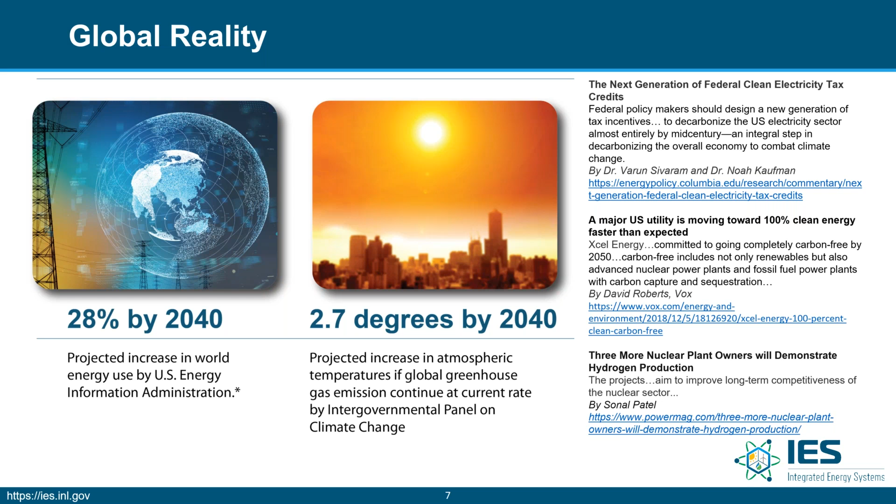If we look around the web at many different articles and announcements, we can find numerous examples of attempts to address these challenges. I've included a few here related to the introduction of federal clean energy or clean electricity tax credits, and utilities moving toward 100% clean electricity or clean energy across different use sectors. We're even beginning to see nuclear plant owners and operators look beyond the electric sector to address what else their energy can be used for.

I'd like to draw your attention to an article put out last December by the non-government organization Third Way. This article, and several of my slides, will focus on U.S. energy markets and sectors. Many of these trends, I believe, will translate to your countries as well, so please take these as examples, and I encourage you to look at what's happening in your own countries and regions. This Third Way article looked at clean energy commitments around the country to assess how we are going to achieve the incredible challenges associated with emissions and environmental impact.

Prior to 2016, 90% of the commitments out there were exclusive to renewable energy. We saw renewable portfolio standards, goals for 50% or even 80 or 100% renewable generation. However, since 2016, we've seen a reversal, with 65% of the states, utilities, and major cities that have these types of goals and standards now embracing commitments that are technology inclusive. These clean energy standards now allow us to take advantage of all clean energy generators, including nuclear energy, carbon capture and sequestration, as well as other carbon-free options.

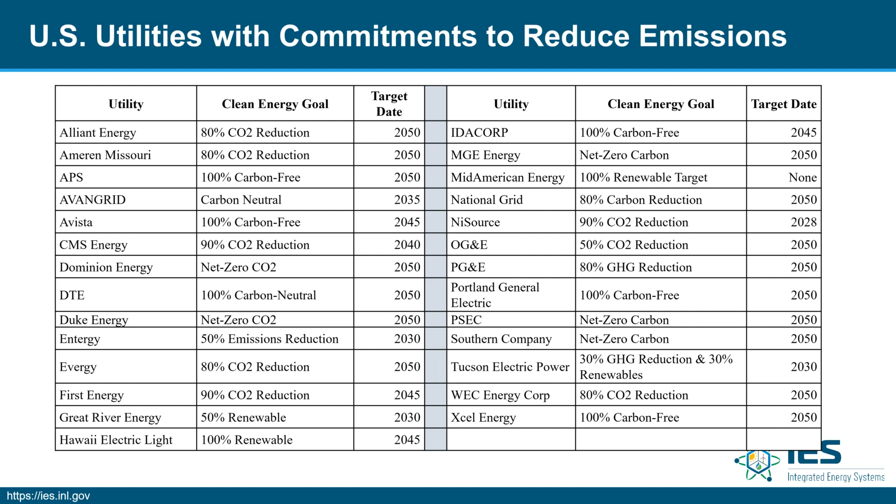Another way to do this, of course, is by increasing renewable generation, and introduction of wind and solar and hydro where it is available is a great idea. We really have to look at all the technologies available to us in a particular region to meet these aggressive goals. But let's pause for a moment and understand what that means.

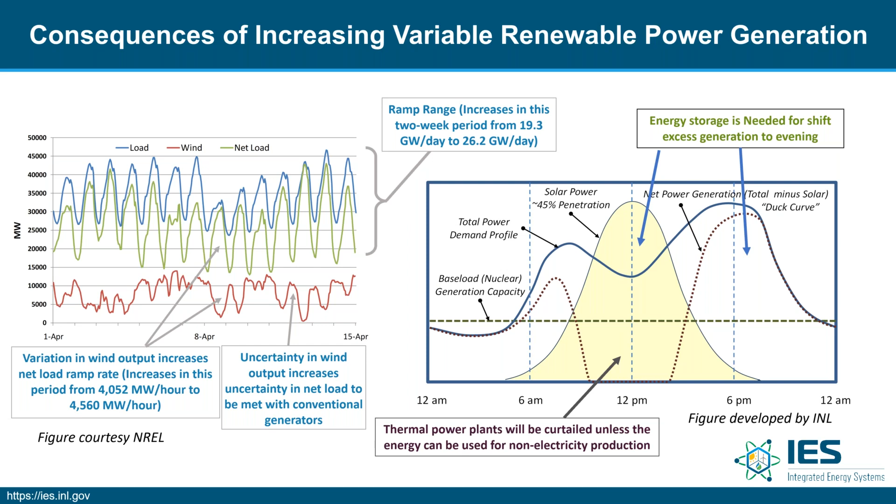So we did some analyses at INL, at Idaho National Lab, which is the nation's nuclear laboratory in the US. We did some analysis to better understand the volatility within the net demand and how that changes as we increase the penetration or the production from variable generation in a particular region.

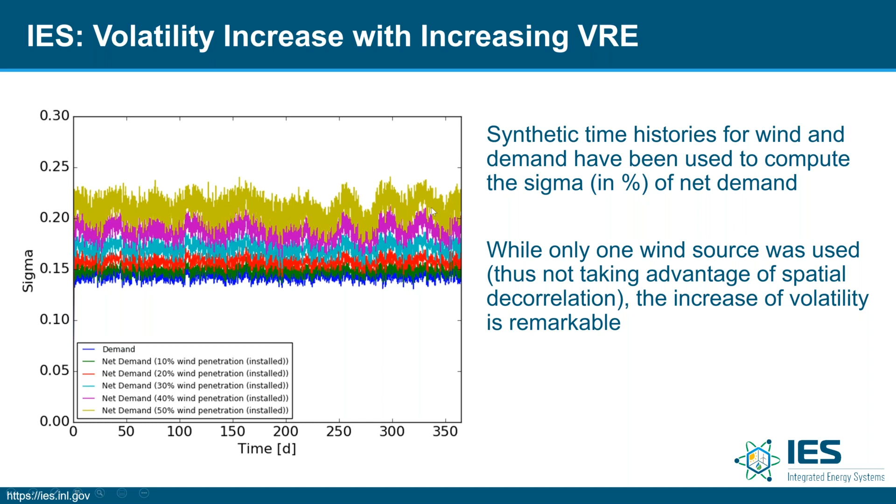A little bit of wind doesn't make a huge difference. A lot of wind does, and so we have to think about this differently.

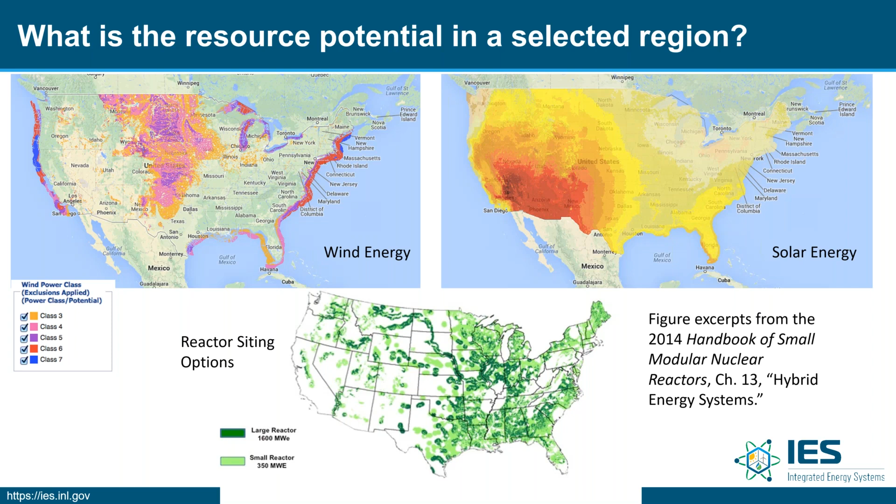Using this as an example, we can begin to understand that we will have different energy mixes and different opportunities in each region. So each of these analyses and considerations that we walk through in considering different types of energy systems need to take this into account for particular regional locations.

So what is the future of nuclear energy? Where are we going, and how will it play a role in these future energy mixes? I'd like to draw your attention to the Future of Nuclear Energy study completed in 2018 by the Massachusetts Institute of Technology and the many experts they brought in to work with them. I've summarized a couple of the key findings from this report.

Bottom line, the world faces new challenges of drastically reducing the emissions of greenhouse gases while simultaneously expanding energy access and economic opportunities to billions of people, those regions that don't have access to energy right now, and certainly don't have access to clean energy.

Second, there are a variety of low or zero carbon technologies that can be used in a variety of combinations in order to meet this growing demand. Absolutely, there are a number of solutions we can look at. But their studies showed that without contributions from nuclear energy, the cost associated with achieving deep decarbonization targets, dramatic reduction in CO2 emissions, increases significantly.

And overall, the least cost portfolios always include an important share for nuclear energy, and the magnitude of that share grows significantly as we bring the cost of nuclear down. So we need to reduce the cost of nuclear to ensure it continues to play a very important role in these future energy systems.

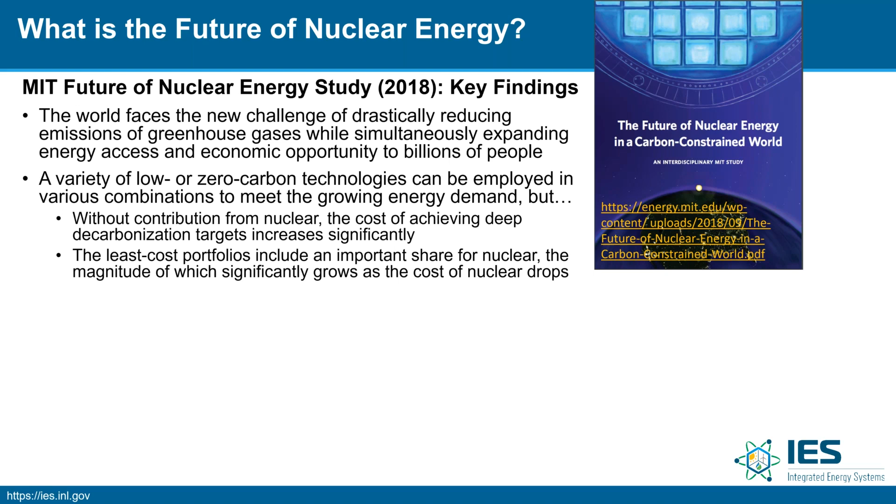Similarly, the International Energy Agency developed a Nuclear Power in a Clean Energy System report last May, in May of 2019. What they found, and one of the key points I like to pull out, is that despite significant renewable energy growth globally over the last 20 years, the overall contribution of clean energy supply to electric generation really didn't change.

Why is that? Well, in the US and in many other parts of the world, we have extremely low-cost, historically low-cost natural gas. As that comes in, it is displacing nuclear generation. So we have more renewable generators coming on, low-cost natural gas coming in, and pushing nuclear energy out of that marketplace. Natural gas turbines are scalable, allow for rapid ramping, and therefore are great complements to wind and solar generation, but they have associated CO2 emissions unless carbon capture is also implemented.

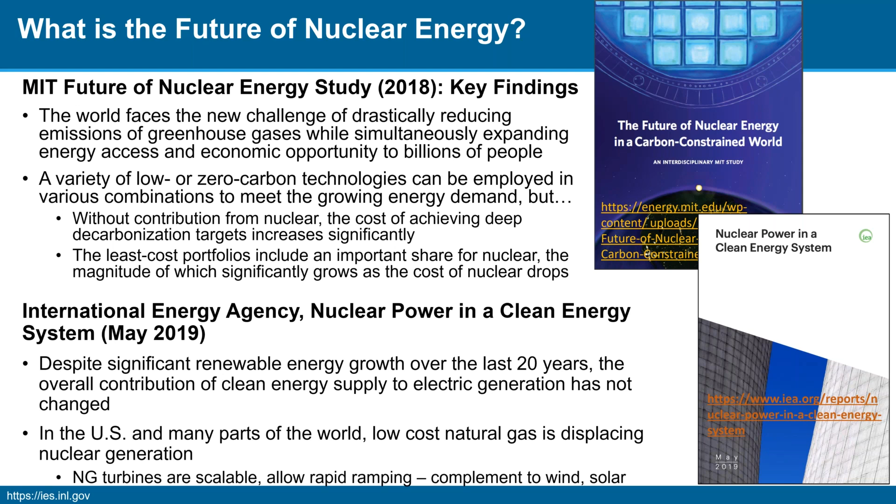So we need to think about how we do this. We need to be cost competitive with these other resources to ensure nuclear generation is not pushed out of the market and that it continues to provide such important shares of clean energy generation. Globally, nuclear provides one-third of the clean electricity generation around the world. In the US, it's more than half of our non-emitting electricity. So it's important that we don't push this out of the market inadvertently.

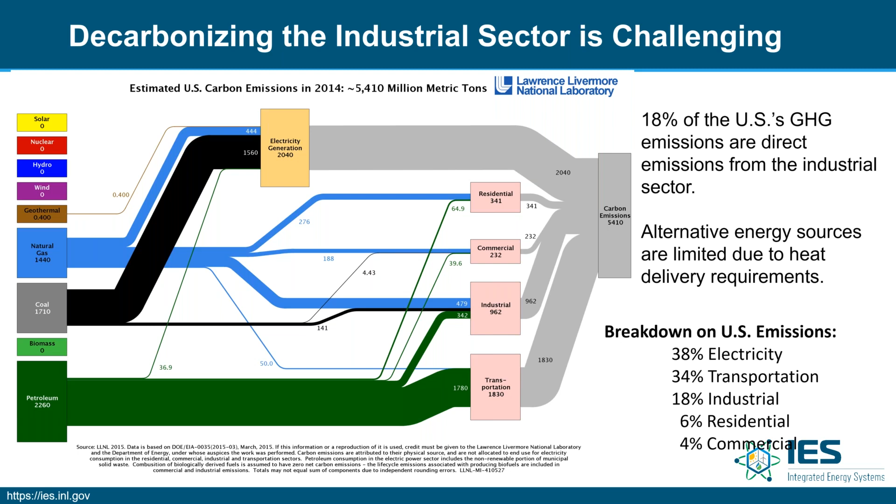Often when we think about achieving emissions reductions, we traditionally think about the electric sector. In the US, the electric sector contributes 38% of our emissions. But that's not all we need to be concerned about, especially with aggressive reduction goals. We also need to look at the 34% from transportation, and 18% from industrial processes, which are often very difficult to electrify and hard to support with anything other than a carbon-based resource that provides high quality heat. So we need to address these top three emitters—electricity, transportation, and industry—as we look to alternative energy resources and configurations in the future.

At this point, I'd like to take a diversion to talk about planning tools used for future energy resources, and energy market modeling. I'm no expert in this area and would defer detailed questions to colleagues who work with these tools regularly, but I've been learning a lot about how these tools model our markets and different technologies. This is extremely important for understanding how we plan our long-term energy mix and how we utilize these systems day-to-day and week-to-week.

First, capacity expansion models. These model the evolution of systems of electricity generation assets over long-range time periods. They consider changes in demand for energy, retirements of different units, and completion of construction projects for new generation capacity, in order to determine if additional capacity will be needed to meet future demand. If new capacity is needed, these tools determine the lowest cost capacity additions necessary to meet projected demand, including a factor for reserve energy, and they also account for how long it takes to build these new technologies. Some models include other parts of the economy to determine demand, but in general these focus on the electricity sector.

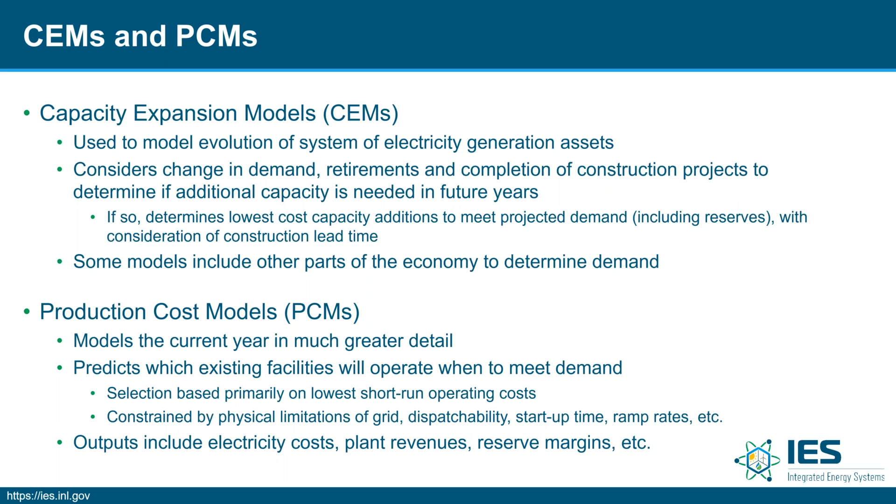Let's talk about the timescales these models operate over. When planning for our energy systems, we need to understand a wide range of timescales. On the left, we're working down to the 10 to the minus 3, or millisecond, timescale. All the way on the right, we're at the 10 to the 9 second timescale, or 30 years. We need to understand how different assets will be utilized across all these timescales. On the right are capacity expansion models—that long range planning, informed by a number of approximations. In the middle are production cost models, looking at near-term markets such as hour-ahead dispatching and day-ahead scheduling of resources, also informed by approximations. At the lower end of the timescale, we have assets providing frequency regulation and inertial response to ensure a reliable and resilient grid.

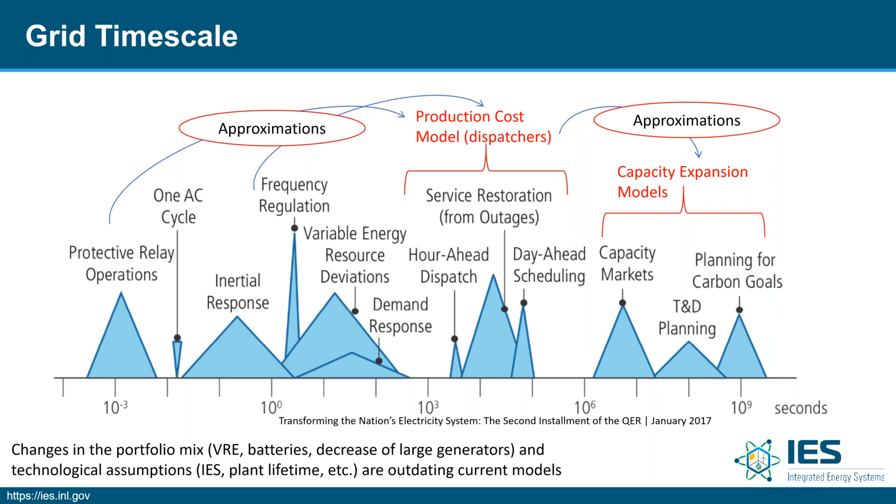Changes in our portfolio mix as we add variable renewables or batteries, or remove some of our large scale thermal generators, and various technology assumptions associated with modification of those systems, such as the introduction of integrated systems or extension of plant lifetimes. These changes are outdating the current models we utilize for PCMs and CEMs, so we need to understand what that's doing to our predictions.

A little bit further on capacity expansion models: as I said, these cover large regions. For the US, that means they cover the whole US, or large US regions. They take into account a number of different initial conditions, what the current portfolio is, the cost projections associated with many different technologies, and the cost projections for feedstock, the raw materials that need to go into a certain process, such as natural gas, coal, or uranium.

The predicted portfolio mix over the long term is highly sensitive to how we set those initial conditions. This sensitivity creates a nonlinear feedback associated with all these externalities that we just don't model. As we said, the time horizon associated with these is 30 years or more, so these are designed for a long-term economic equilibrium.

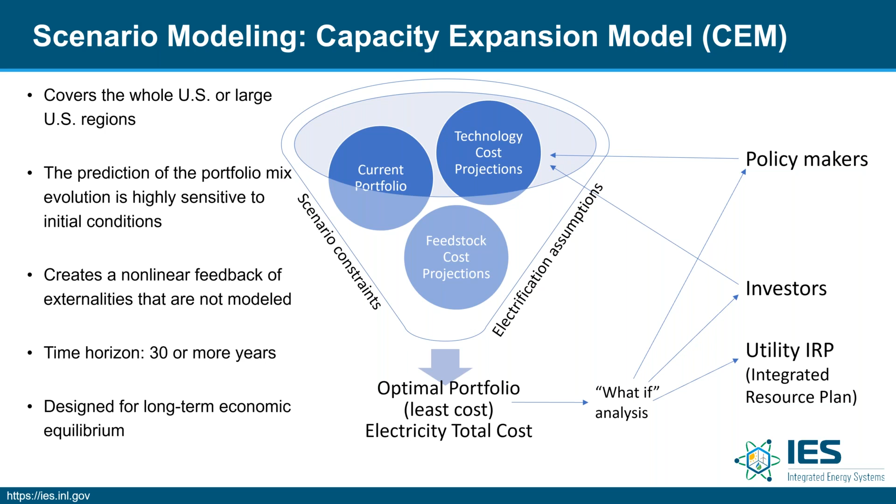These CEMs can take into consideration different policies. How will those different policies modify cost projections such that it will modify the end portfolio that is predicted? We have investors feeding some of that as well. Utilities use these tools to develop an integrated resource plan, so we need to understand all the different variables going into the system to understand their output.

So their outputs overall look at projected portfolio compositions. They look at increases or predicted increases and decreases in the cost of electricity. They can predict CO2 emissions at a given time in the future. And as we were referring to, they look at what-if scenarios with respect to new energy policies.

If there's a consideration to introduce a new energy policy, we can put that into these CEMs as an externality to understand the potential impact of both current laws and potential new policies that constrain the portfolio composition. We can also consider the impact of technology maturation.

What happens if technology costs drop dramatically? What happens if the capabilities of those technologies increase dramatically? We can also look at the impact on resources, changes in feedstock.

For example, no one predicted the historic low costs of natural gas that we have today, introduced by fracking. We can look at what-if scenarios that consider: what if natural gas were half the cost it is today? How would that change how we build out our systems? Or what if new reactors cost half of what we expect them to cost? How will that impact our overall mix?

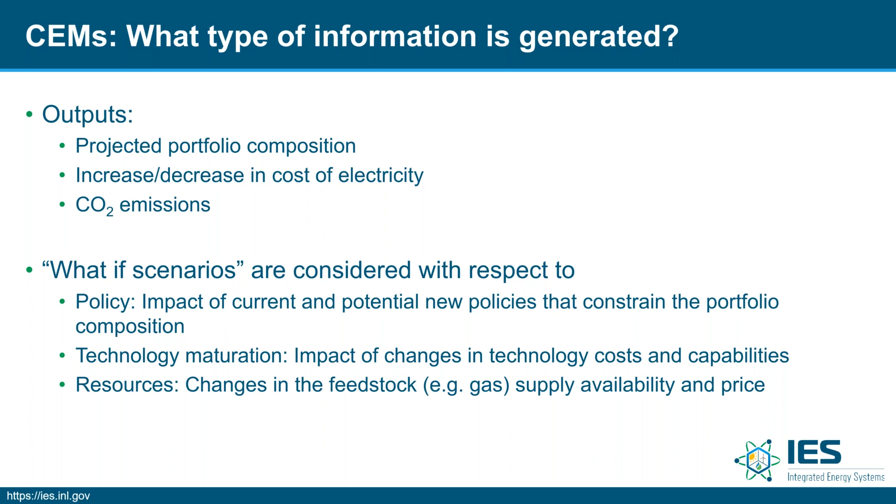It's important to understand how these results are used. These results are used by federal organizations in order to inform policymakers and decision makers concerning how achievable some of the goals they set might be, and how costly achieving those goals might be. Goals that might be looked at include CO2 emission limits, energy independence, portfolio diversification, or grid reliability.

These results are used by research organizations, such as the Department of Energy in the US, in order to prioritize research budgets to meet certain technology development or deployment goals. They're also used by large companies to prioritize research and capital investments, and used as input to energy planning to develop integrated resource plans, for example. They're also used by international organizations and developing nations that want to consider different scenarios as they plan for development.

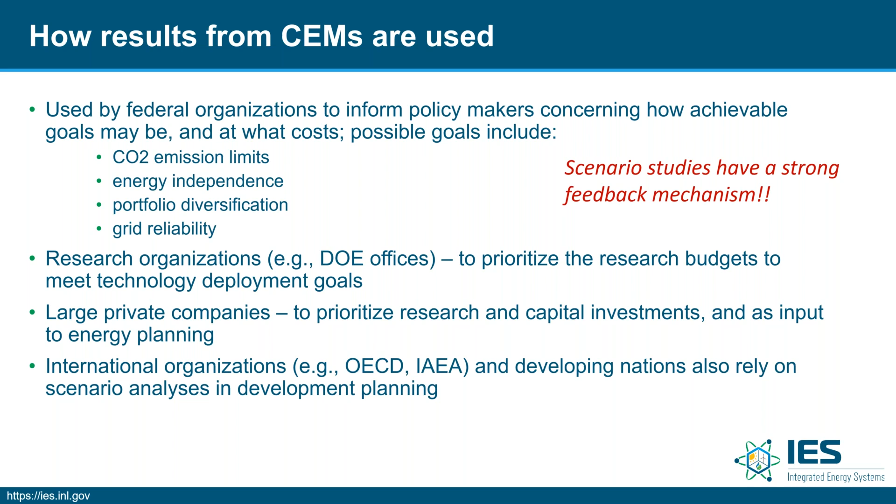As you might expect, these scenario studies have a strong feedback mechanism. If we look at certain scenarios that look pretty good 30 years in the future, investments will be made in the technologies associated with those scenarios, and investments may not be made in other technologies, such that we, in a way, make our own future by trusting some of these predictions overtly. So we need to understand the predictions and any associated biases in these predictions to ensure that we don't write our own future in a way that is overly constrained.

Production cost models - let's talk a little bit more about those. As I said, these are shorter time horizons, so they look at one-year horizons. These cover large regions with different levels of fidelity, having a higher level of fidelity and time fidelity associated with them than the capacity expansion models.

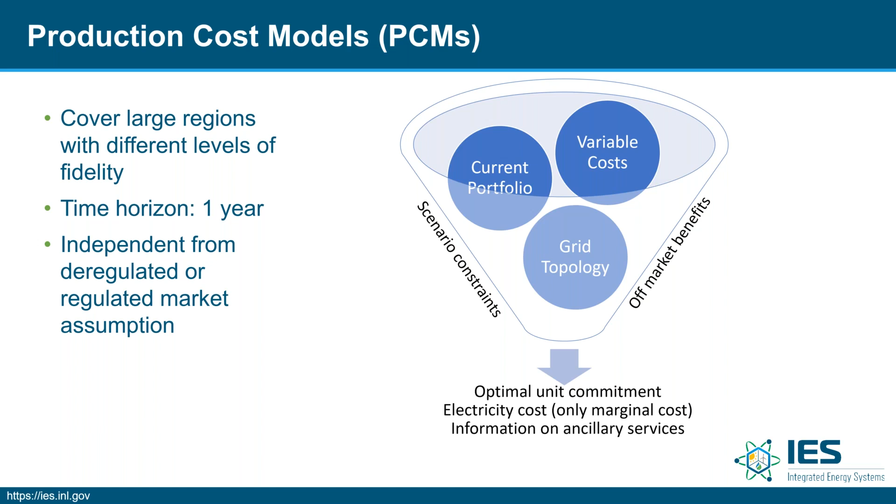They're independent from deregulated or regulated market assumptions. Again, they have a lot of initial conditions coming into them, looking at the current portfolios. They include estimates for variable costs as well as the grid topology. And these are used to understand how we might commit certain assets on the grid from one point in time to the next.

So how are they used? These models are used to test various dispatch strategies. They can also help us predict potential grid congestion problems—when we're going to have too many assets in one region trying to meet net demand further down the grid architecture than where that generation is. They can also be used to predict unit revenues associated with certain plants, and to estimate whether or not we have sufficient reserves being produced at a given time.

Just as an example, and I'll talk about this Exelon case as we get further into this presentation, we utilize capacity expansion models, such as the ReEDS tool developed by our colleagues at the National Renewable Energy Lab, to look at portfolio evolution from today out to say 2042. For any given year, we then use an associated production cost model, such as Plexos, to predict how those assets will be utilized. Now, in the work we've been doing, we've added an additional tool—we'll talk about what Raven and Heron are—to assess what the optimal design for a future energy system might be, to produce the maximum net present value for that system.

So we're using these optimization tools that we've developed within the laboratory to now design those systems and feed those back into this process.

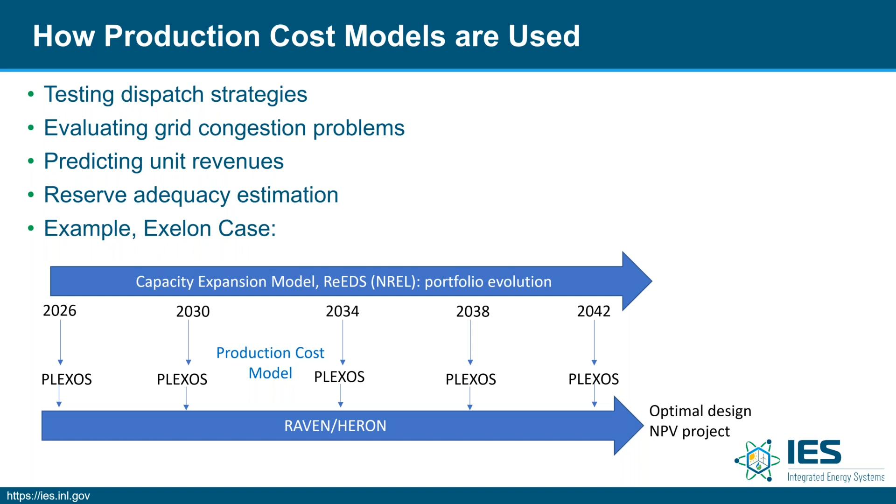There is room for improvement with regard to how these models approach nuclear energy technologies and the assumptions that are made. There are limitations in the nuclear technology that is represented within these models, and limitations in the plant sizes that are considered. They're limited in how long these systems operate, and sometimes do not have license extension opportunities within them. Many of them don't allow for economic dispatch or load following of different units, instead treating nuclear as a baseload supply.

They also are limited with regard to progressive capacity addition. Many of the small modular reactors being developed would be multi-modular plants, where we can build capacity and add capacity to those plants as needed by a particular community. That's not well represented in these models, nor are power uprates, which we've been implementing in current fleet plants for some time.

There are many market limitations that can also impact nuclear differently than some of the other assets being considered. With regard to global system costs, there are considerations around waste management and environmental impact, including topics around spent fuel management or environmental management, such as decommissioning and CO2 emissions.

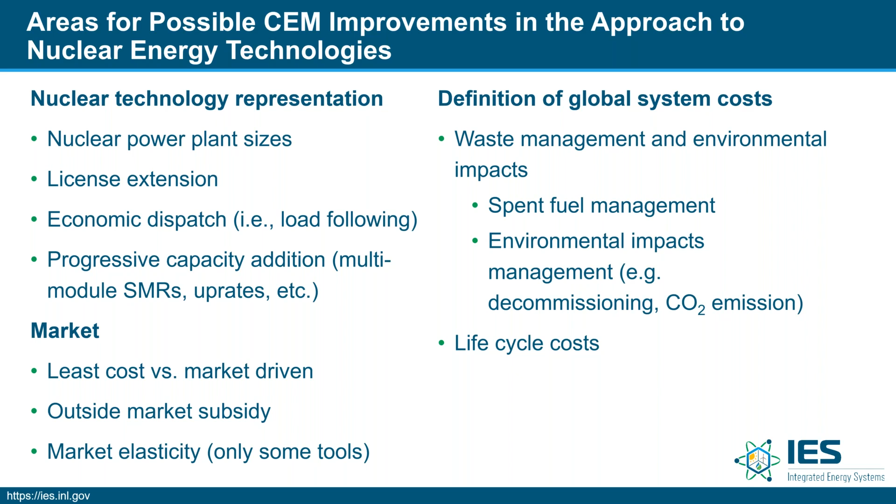So again, looking for areas of improvement, going back to this timescale plot—we need to begin thinking about tools that allow for multi-scale approximation, not just looking within one timescale or another. These multi-scale approximations are really important to include in order to equal out the competition among generators, to make it a fair competition. We need to begin to capture the cost and benefit of changes in the portfolio at all of these scales.

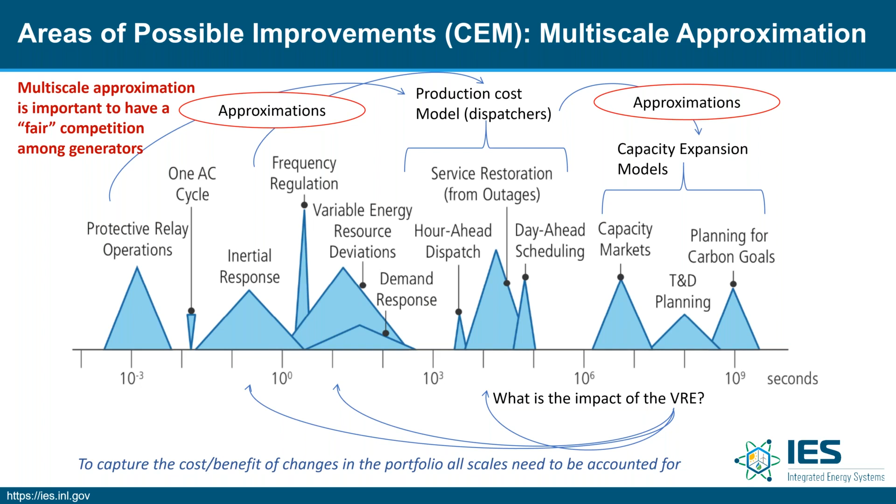Understanding how selection of a certain asset 30 years in the future will impact the inertial response or the frequency regulation within the grid at that future time is extremely important, yet extremely difficult to capture in a single tool. These multi-scale approximations matter directly to nuclear energy, which provides inertia to the grid at that low timescale, but operates for extremely long periods of time—additional aspects of these systems can be brought in when we introduce flexible load following operation or hybrid integrated system opportunities, where we're producing and utilizing not just electricity, but also thermal energy.

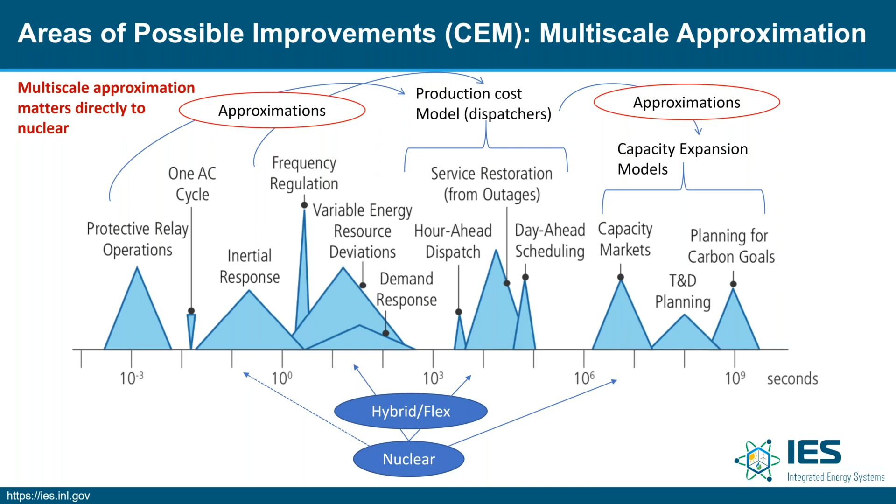So understanding how these different considerations can impact across this wide timescale range is really important to understanding the impact on our future systems and our predictions. So there are also areas of improvement for production cost models. Again, PCMs contain multiple timescale approximations, but they're not used to cover more than one year due to computational limitations.

So there are many aspects that simply can't be treated within these PCMs. They can't include grid expansion opportunities or capacity portfolio changes fully. The ramp rates assumed in these are also linear, so they're missing some important memory effects in some of the systems. And they also don't fully include uncertainty in demand or variable renewable production in most of these models. So there's always areas for improvement in any models, and we need to understand how those limitations impact our results.

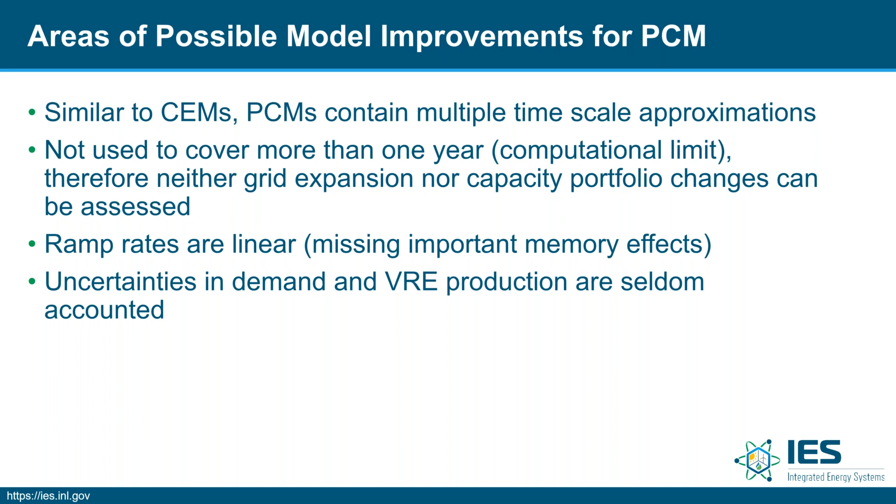So some key takeaways from these market modeling tools and our discussion here. We certainly can improve the modeling of the technical and the economic aspects of nuclear technologies. This does appear to be feasible, but we have some work to do.

Currently, many of the capacity expansion models just model one nuclear option, which is a gigawatt scale light water reactor that operates as base load for 40 to 60 years. Those of you on the webinar mostly know that, yes, that is what we have today, and that's great. Those are fantastic assets, but those opportunities are changing.

We have a large number, dozens of companies that are developing advanced reactors that come in various types and sizes and operate at different temperatures. These systems allow for load following, and we need to begin including those options in these capacity expansion models as well.

And we need to understand the impacts of different assumptions on the decisions that are made. We can also improve market representation, offer many different opportunities or types of markets within these models.

We talked a little bit about total life cycle costs. This is a pretty challenging issue to tackle, but again, it will provide a more balanced approach in evaluating competing technologies if we look at full life cycle costs for all of the technologies.

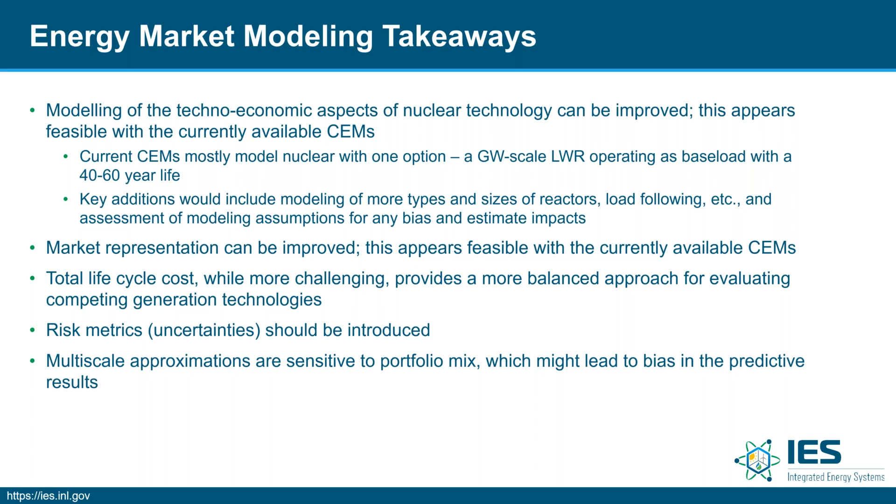Instead, our colleagues at the Electric Power Research Institute, the National Renewable Energy Laboratory, the Energy Information Administration, and the Environmental Protection Agency will be working with their own models to understand how assumptions impact results and how results differ across these different models, such that we can begin to identify limitations in each of those models and improvements that may be necessary to ensure that we're looking at future energy options as accurately as we possibly can. So we hope to have results for that in about 1.5 to 2 years in the completion of that study.

Okay, with that, let's talk a little bit more about innovative nuclear technologies that we can draw upon for our future energy systems, but also approaches where we might modify how we utilize our current energy systems, our current nuclear technologies.

Today, we have a fairly strong electricity-only focus. We have independent assets such as a nuclear plant or a wind generation facility or a fossil plant or solar farm that provide electricity to the grid independently. And we have independent system operators that manage the grid and manage those assets on the grid.

Now, we also have assets that independently provide thermal energy to industrial applications, such as coal-fired or natural gas-fired units that provide heat to drive different processes. What we are working to shift to is a future grid or a future energy system that looks to maximize energy utilization, maximizing the invested capital that we have in these different generators on the grid, while maintaining generator profitability and affordability to the end customer, as well as grid reliability and resilience.

As we begin to consider these coordinated energy systems or tightly coupled energy systems that might be in an energy park type of configuration, we need to look at all of the assets available to us, including renewables and fossil with carbon capture and sequestration, as well as nuclear technologies, either at the large scale or at the very small scale down to microreactors.

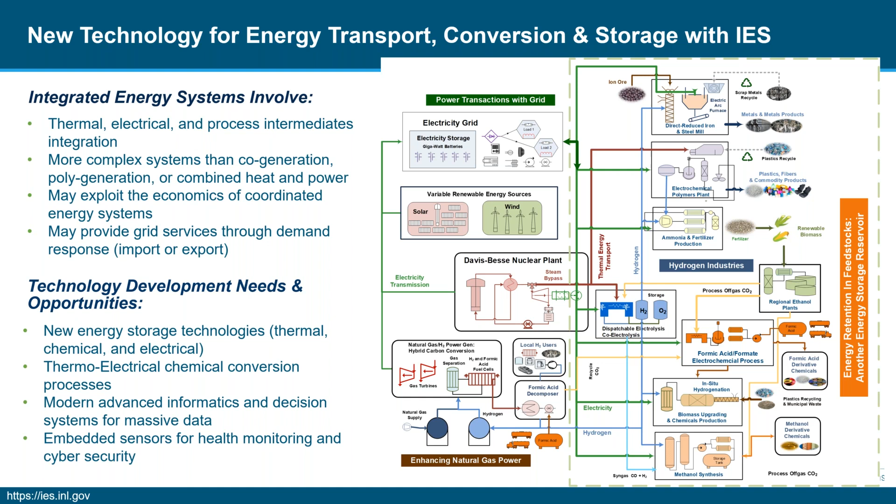We have so much more data moving around. There's more opportunity for cyber attack if we don't design these systems properly from the start. And we also need to consider embedded sensors for health monitoring and condition monitoring throughout the system to ensure that they operate in a stable fashion in this integrated system approach.

So truly, we are introducing a new paradigm for nuclear energy, where we are looking at opportunities to utilize that energy in its various forms, whether that be electricity, heat, or even using radiation to drive some of these processes to meet consumer needs, to produce the products that we show on the right as just some examples.

This might include processes such as electrification to achieve some of these end goals, or process intensification and redesigning some of these processes, again, to better meet the energy supply that we have available within a nuclear system. And it may include evolutionary direct conversion processes as well that we can implement in these integrated systems to achieve production of these consumer products on the right.

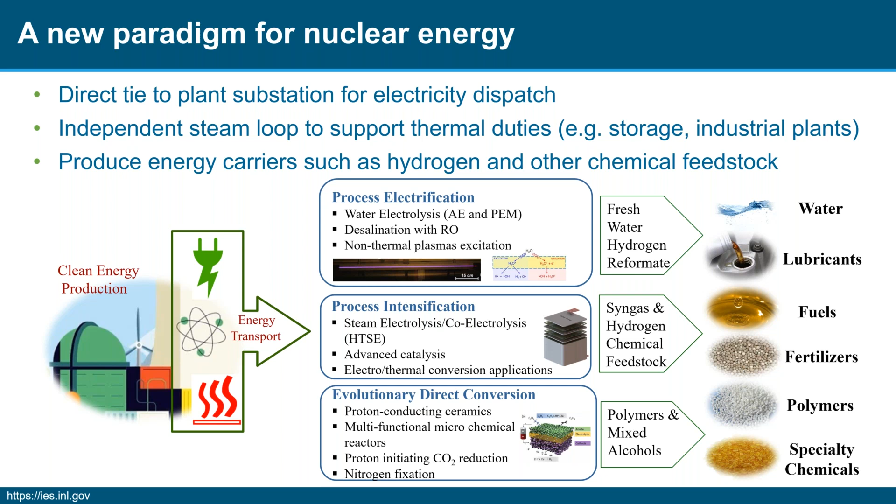So let me introduce you to one of the programs working on this. I lead the DOE Office of Nuclear Energy program on integrated energy systems, which falls within the cross-cutting technology development program area. Cross-cutting means that we want to support multiple applications, multiple programs across the Office of Nuclear Energy overall.

You've already seen our mission. Our mission is to maximize how we utilize our energy resources to achieve these end goals of reliability and resilience, using our nuclear energy resources across all energy use sectors in coordination with these other generators on the grid.

Our vision overall is that we will achieve a robust, economically viable fleet of both light water reactors, like those operating today, as well as advanced nuclear reactors that can support both baseload electricity needs, as well as providing flexible operation to support a broad range of non-electric products and grid services.

So the goals in the program look across the technology potential. We look at current fleet applications and what can we do now with the current fleet to commercialize these concepts. For small modular reactors, we have a slightly longer timeline of 1 to 5 years to understand how we move integrated system options toward commercialization with those types of facilities. And for advanced non-water cooled reactors, we'll look at a slightly longer time horizon of 5 to 15 years.

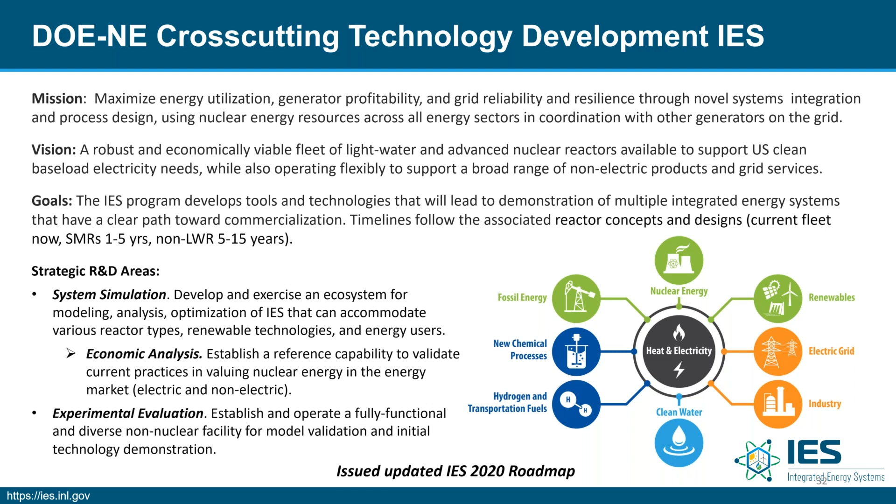So what I really want to leave you with, if you don't dive into all the technical analyses that I'll go through, I want you to understand that integrated systems offer a key opportunity for flexibility and enhanced flexibility of our grid systems and our overall electricity supply.

Nuclear plants in many regions have been operating flexibly for many years. France has a great operating history of flexibly operating their plants, as do many plants in North America that respond to hydro generation. But we can do more in how we operate these systems flexibly when we begin to introduce new concepts.

Concepts such as product flexibility, which is at the heart of these integrated energy systems, where when we have sufficient electricity to meet grid demand by other generators, renewable generators for example, excess thermal energy from our clean nuclear plants can be used to create many diverse products, such as clean water, hydrogen, can provide for district heating, production of synthetic fuels or ammonia, and refining different metals.

We can also direct that excess energy to different storage components such that it can be accessed and utilized when it's needed at a later time.

As we have more and more advanced reactors being developed, we then can begin to consider size flexibility as well, or deployment flexibility. Most of our plants today are very large scale, operating on the order of 1 gigawatt of electric power. We see more and more small modular reactors being introduced on the order of 300 megawatts electric as a maximum. And we're even seeing development of very small systems on the order of 1 megawatt electric, in some cases even smaller, to meet needs in a variety of communities or remote applications, such that nuclear energy now is an option that can be right-sized to meet those needs.

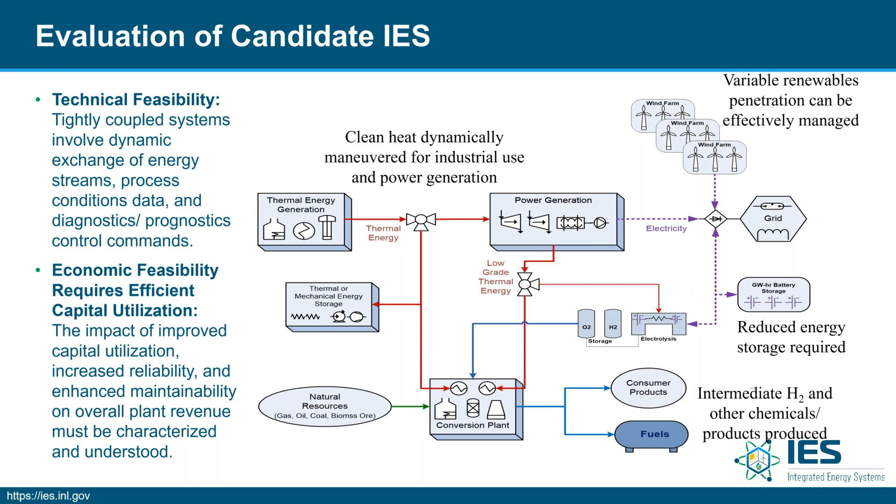So we take a multi-phase approach when we analyze these energy systems. We start with basic process modeling, using off-the-shelf tools like Aspen Plus and HYSYS. This process modeling allows us to do the initial assessment of technical and economic value of a proposed configuration.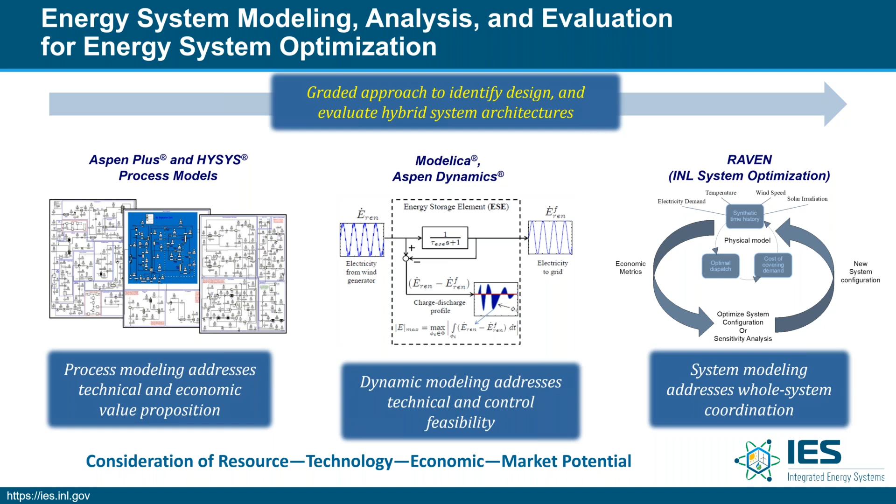Most of this work is in steady state, just to look at feasibility. When we find feasible solutions for a particular application and location, we then move into dynamic modeling. Here we develop complex, detailed models for these systems that will address both the technical and control feasibility of these different options. Finally, we move into utilizing an optimization tool we've developed to assess system-wide coordination and optimization in the design, as well as use of individual assets within a configuration. We'll talk more about that optimization approach in just a moment.

When we do these assessments, we have to consider resource potential: how much of that resource is available, what is the quality of that resource. If we're using coal as a carbon resource for a consumer product that contains those carbon-based molecules, we need to understand what the quality of that coal was. How will that impact the processes? How will we move that resource where it is needed? What are the infrastructure requirements?

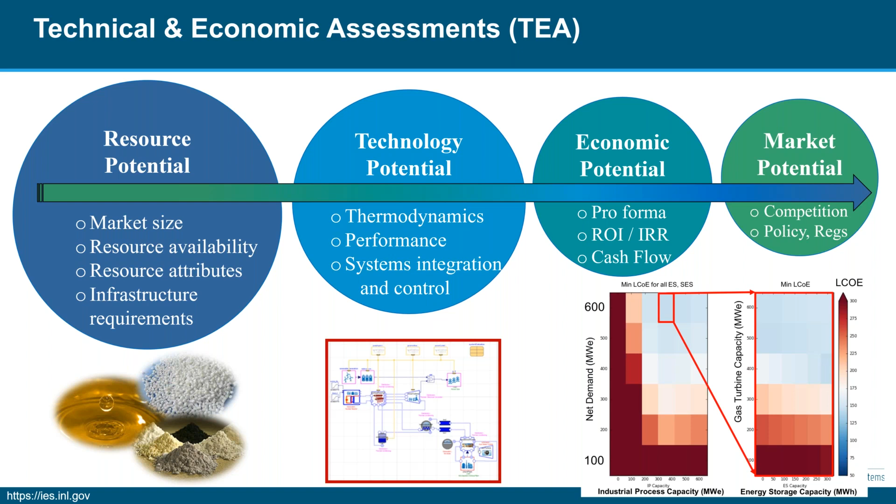We then assess technology potential, thermodynamics and overall performance. What is the availability of that technology today, or the readiness, and what will it be in just a few years? We then look at economic potential, the various cash flows in these systems, and return on investment. Then we need to understand market potential: what is the competitor in the market, and how will the market be influenced by potential new policies or regulations? So all of these come into play when we assess these potential options.

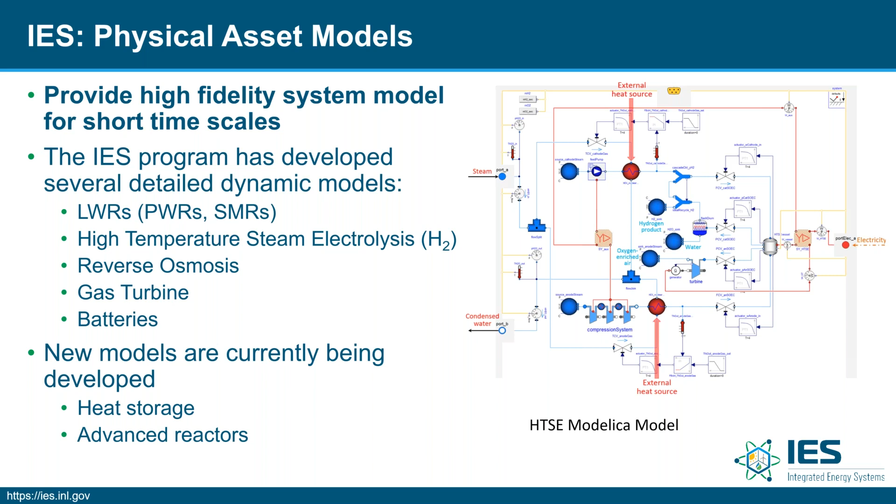These physical asset models that I mentioned, that Modelica piece, provide high fidelity system models over short time scales so the system dynamics are truly understood and characterized. The program has developed detailed dynamic models for reactor concepts, hydrogen production, and water purification. We also include gas turbine models for additional power input for power peaking, and storage models, first including batteries. We're continually enhancing these models, introducing new ones for thermal storage or heat storage, as well as advanced reactors. Over the next year, we'll introduce many more models into this toolbox to allow us to assess different configurations.

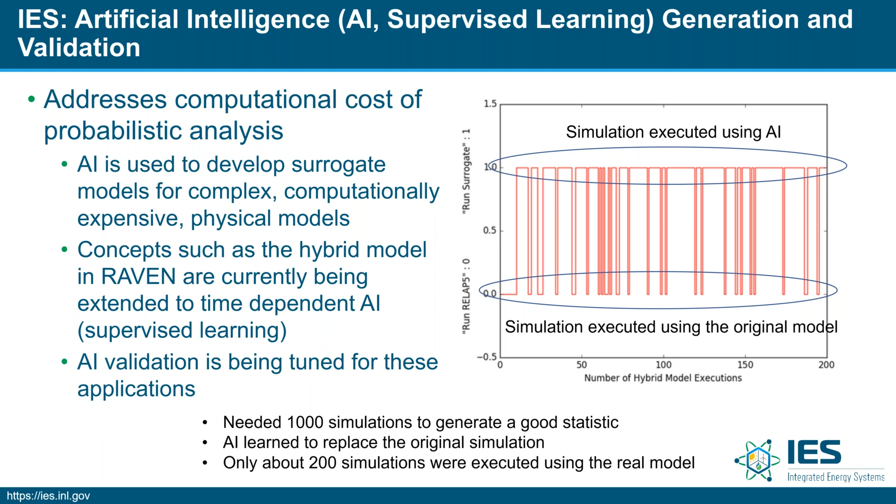We also use artificial intelligence, or supervised learning, to address some of the computational challenges associated with these analyses. We use AI to develop surrogate models for these complex, computationally expensive physical models, which allows us to reduce the number of simulations needed to achieve good statistics. In the example here, comparing the full model versus the surrogate model, we were able to reduce simulations to 200 using the real model, while accessing the surrogate model for the other simulations necessary to achieve good statistics. So this goes into our modeling tools.

I've already talked a lot about these market modeling tools and what we can do to improve them with regard to representation of nuclear assets, generation options and timelines and costs associated with those, and how we can dispatch those nuclear energy systems, allowing for load following.

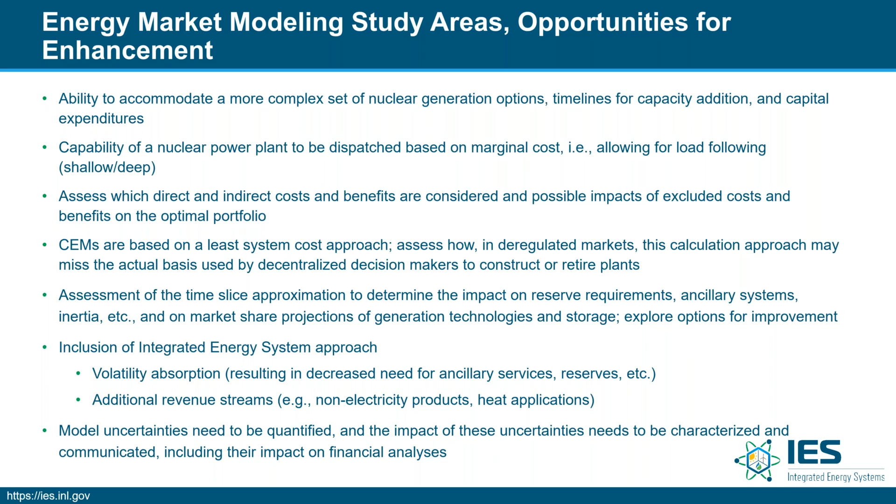We need to understand, dialing down further on this, how these models can also include integrated energy systems. Representation of these new systems that bring in multiple assets can help us better understand how these new technologies could absorb volatility in the system, reducing our need for ancillary services or reserves. We also need to include additional revenue streams, so these integrated systems aren't just producing electricity, but also other products and supporting heat applications. Bringing this into market modeling tools will be very important to ensure we consider these new technologies in the future.

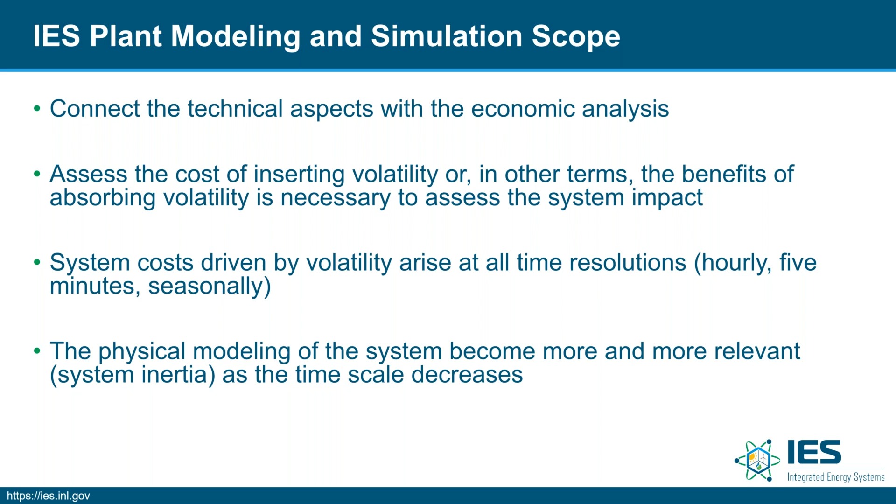When it comes to plant modeling and simulation, we've talked about connecting those technical tools with the economic analysis, so we can truly begin to assess the cost of inserting, or in this case absorbing, volatility with these systems and how it impacts the overall system. We can also begin to understand impacts on system cost and how that changes when we look at hourly resolutions versus seasonal resolutions. Finally, using these detailed physical models becomes more and more relevant as we get down to those lower time scales, as you might imagine.

With regard to the financial framework, we use a system cost approach. We can also use profit analysis. We ensure, with constraints in the system, that the overall energy system will meet demand with high reliability. Overall, we need to understand if these new integrated approaches will decrease the cost of electricity. As we go through these analyses, we usually use the term levelized cost of energy or electricity, but really we're looking at what the cost is of covering that overall demand.

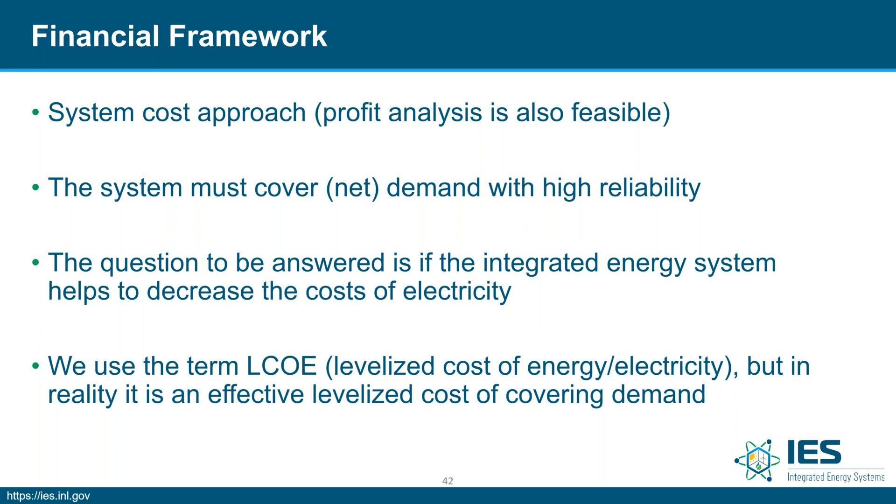So we have a financial analysis workflow that has all these lower level models, the molecular dynamics and neutronics and CFD feeding into these high fidelity conceptual designs represented in the process models in Aspen and HYSYS and the Modelica detailed physical models. These are used to predict process costs, the overall cost of these different processes, and they also feed the RAVEN tool, such that we understand the dynamics of these systems.

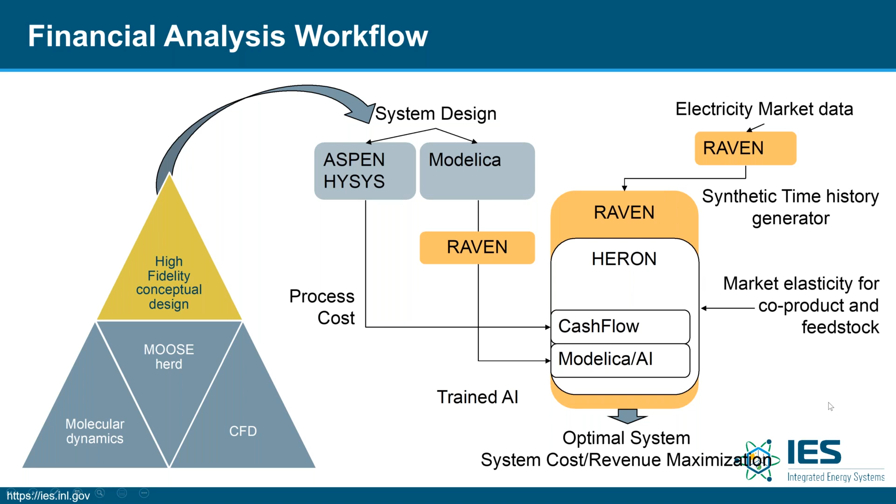When we do these analyses, we bring into account the electricity market data. We use that data to develop synthetic time histories of what the market costs are and the generation. We also bring in market elasticity for the co-products as well as the feedstock that feed these systems. All of these go into this suite of tools to develop an optimal system design that will maximize revenue and minimize system cost.

So this optimization scheme uses Raven. This is the reactor analysis and virtual control environment that allows researchers to gain a better understanding of the probabilistic nature of complex systems and how they're represented numerically. So the overall goal of this multi-fold optimization scheme is to optimize economic performance within these technical performance constraints.

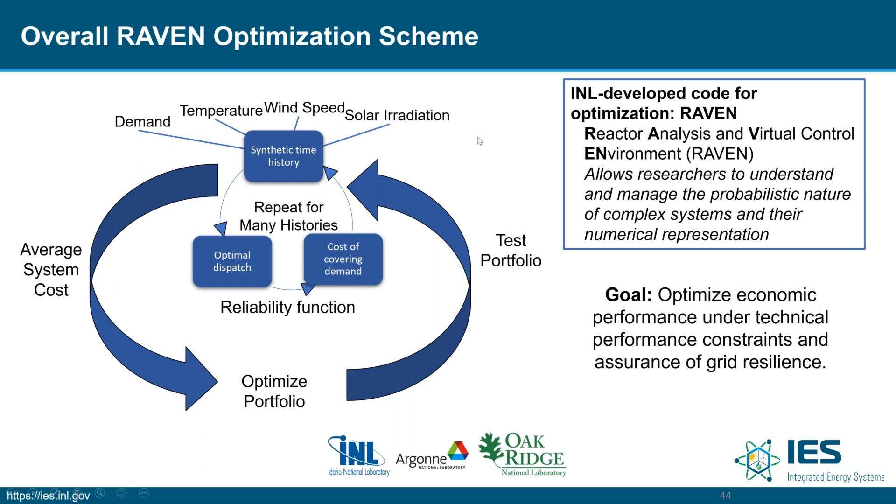So we first look at a level of optimization that looks at how large we need each of these different subsystems to be. How will they work together when we have a reactor and a wind generator and a hydrogen production facility? And then we wrap that with an overall analysis of how we would dispatch this in real time to achieve the optimal economic performance, all taking into account regional information on demand and renewable availability, as well as electricity costs, etc.

We are moving these tools to open source, so you will be able to access them and look at how they can be used within your own application space. Raven is already available open source and has been for a while on this GitHub site. We have now released 2 additional plugins to Raven to support these integrated system analyses.

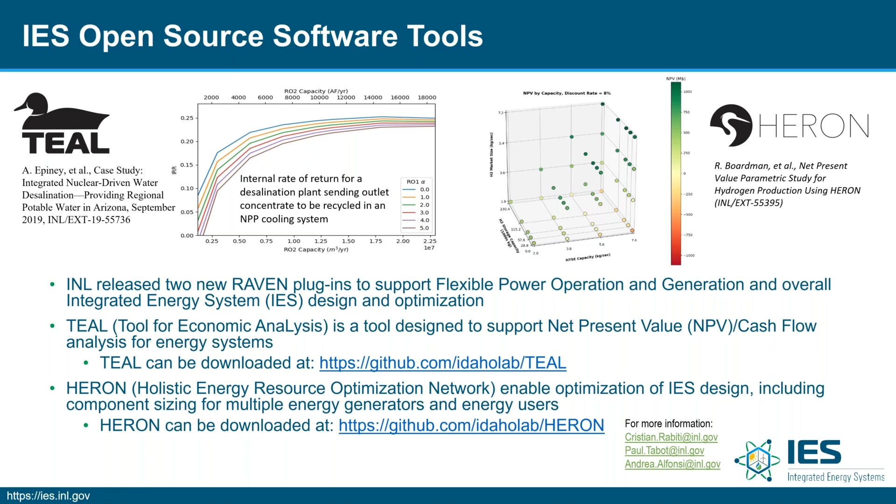The first is TEAL. This is that cash flow analysis for energy systems. And then also Heron, which is a holistic energy resource optimization network that allows us to optimize integrated system design, including these component sizing approaches when we have multiple generators and energy users.

These analyses that we are doing truly are breaking new ground. There are certainly other efforts out there to optimize energy systems. We bring some new approaches in what we are doing within this program.

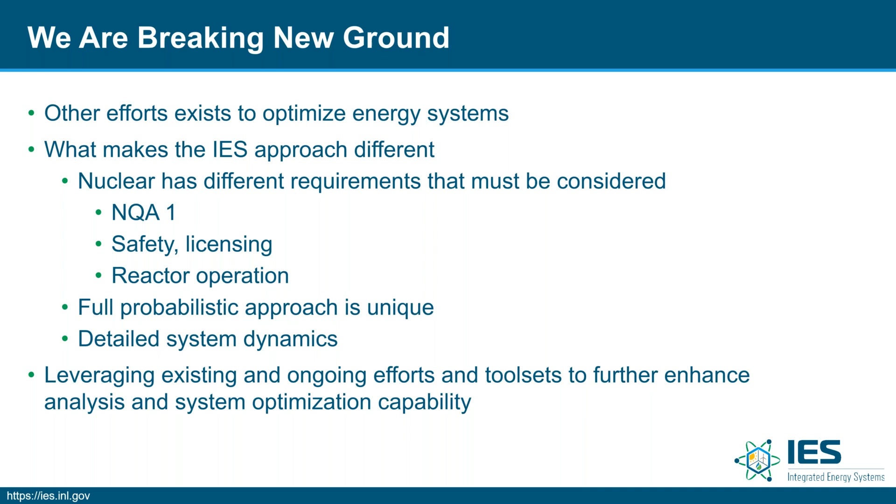Nuclear energy, of course, has different requirements than many other generators. We have to ensure nuclear quality assurance. We need to bring in aspects of safety and licensing, as well as reactor operation. These tools bring in a full probabilistic approach, as well as detailed system dynamics that we've talked about. So in doing so, we leverage existing tool sets as well as ongoing efforts in order to enhance our abilities to analyze and optimize these system designs.

So let's talk about examples. How are we using these tools? This example shows you how we might use multiple interconnected generators to produce electricity to support grid demand. But when we don't need all that electricity on the grid, we can divert both electrical energy as well as some thermal energy to support processes such as hydrogen generation.

Now, if we select a low temperature PEM electrolysis, this would just utilize electrical energy. If we use high temperature electrolysis or steam electrolysis, we also need some of that thermal energy to drive this process. Now, traditionally, hydrogen is produced by steam methane reforming, which breaks down methane or natural gas into hydrogen and CO2. When we use electrolysis, this breaks down water to produce hydrogen and oxygen.

Hydrogen is a really interesting energy carrier. It's highly versatile. It can be transported through natural gas pipelines. It can be stored on site for later use, or it can be moved to its end location of use for electricity production in fuel cells or combustion in gas turbines.

It can also be taken to a number of different users for the production of chemicals, for the production of synthetic fuels that can support then the transportation sector with reduced emissions relative to our standard fuel use in these systems. It can be used to support steel manufacturing, to produce ammonia-based fertilizers. It's highly versatile. And by using this type of configuration, it provides us a second source of revenue for our generators. It also provides us opportunities to support grid services, including reserves as well as grid regulation.

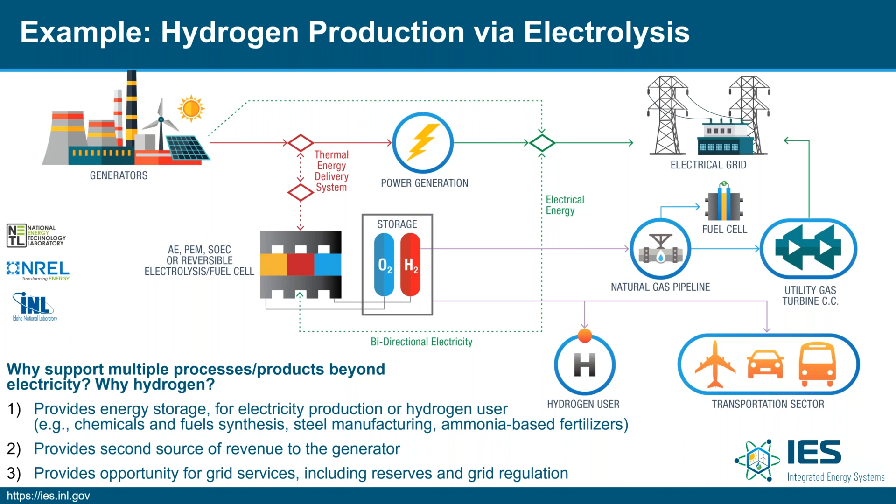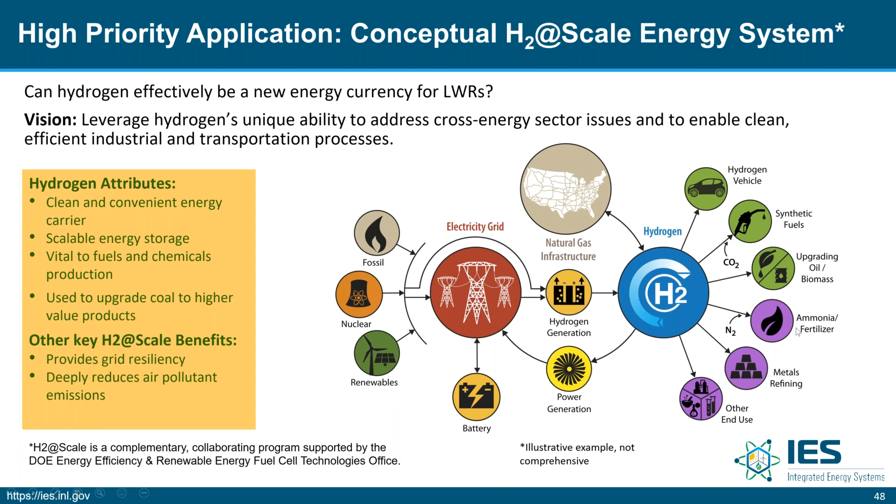This is a high priority area represented in one of the other programs in the Department of Energy called Hydrogen at Scale, where we look at the production of clean or green hydrogen that has no emissions associated with it to support the transportation sector, shown here in the green circles, as well as the industrial sector, shown in the purple circles. So there's a lot of opportunities for hydrogen, and we see that being embraced.

Now, how do we assess this? What does this look like in real time? This example shows some of our early analyses using tools we developed to evaluate these types of systems. This plot shows the potential of how energy would be dispatched in one of these types of energy systems that includes a nuclear plant, a hydrogen production facility, a gas turbine to support peaking, electric battery storage, as well as wind generation at sufficient capacity that wind could fully meet demand when it's available.

So in this case, we can begin to see how the nuclear plant sends energy to the grid in blue, or in brown, how it's sending energy for hydrogen production using the electrolysis facility. We can also see when the battery is being charged and discharged in green, and when we're calling on that electric battery to also meet load. This is the net demand after we've taken into account the wind. This doesn't represent any particular region or location, but it's just an example of how we can use these tools to dynamically assess energy flows.

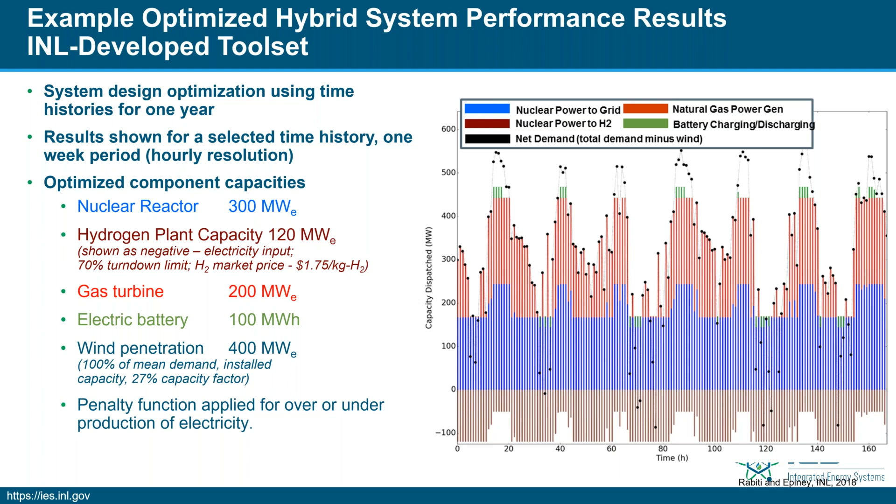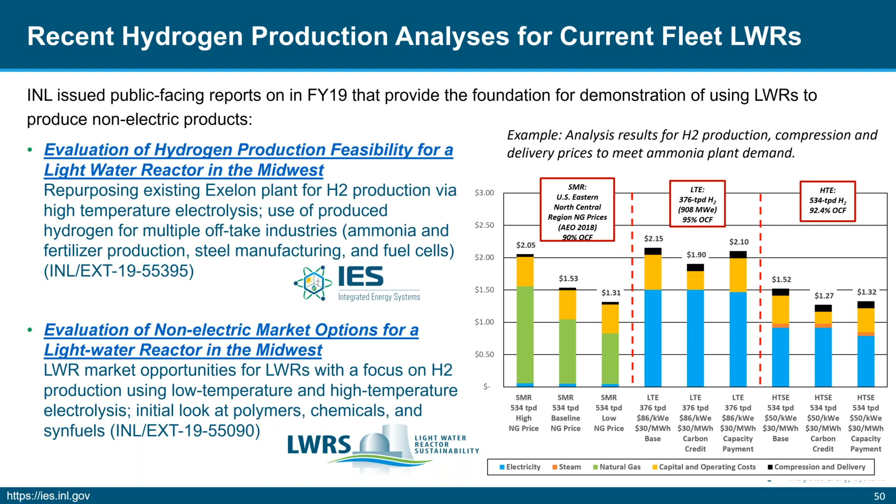We looked at a number of different cases in these studies to understand how this compares to steam methane reforming on the left, how we might utilize low temperature electrolysis and the overall prices of hydrogen that result from that, as well as high temperature electrolysis. Now there are many assumptions and variables that go into this plot, so I don't want to dial in on the specifics, but I encourage you to take a look at these reports to better understand the assumptions being made and the impact on overall predicted prices.

So when we look at this configuration in the upper Midwest of the United States, we might see utilization of a nuclear reactor alongside a wind or solar generation facility, supporting the grid, but also supporting steam electrolysis, where that hydrogen is going to regional markets, petrochemical plants, fertilizer plants, and steel manufacturing facilities. It's also going to chemical facilities in that nearby region and to support the clean transportation fleet. So there are many opportunities where we're simply looking at what is currently available in that regional location and how we might use these new systems to support that.

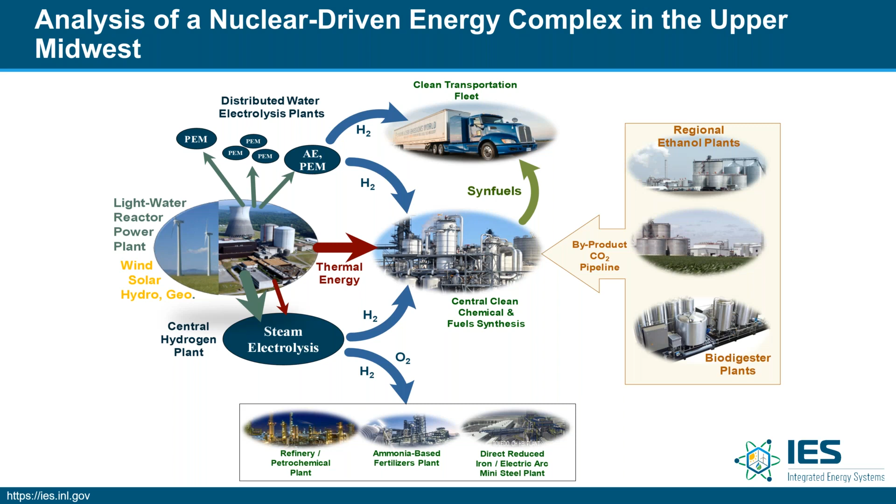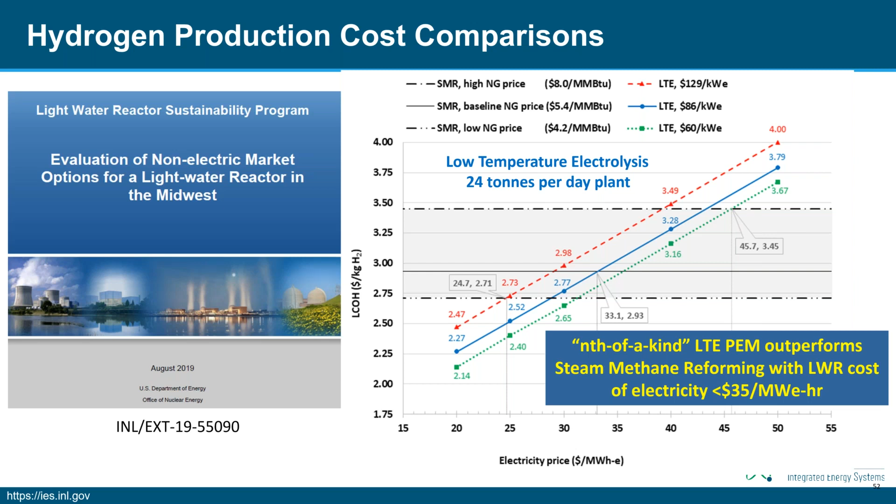So again, looking at these reports, you'll see many different analyses of predicted costs of low temperature electrolysis. This is a relatively small plant producing hydrogen. With a number of different assumptions on electricity prices and demand for that hydrogen, we do see that low temperature electrolysis can outperform steam methane reforming using this light water reactor. Similarly, if we look at steam electrolysis, with some thermal energy coming into the process as well, we again see that we have opportunity to outperform traditional means of hydrogen production using light water reactors at these price points for the levelized cost of electricity.

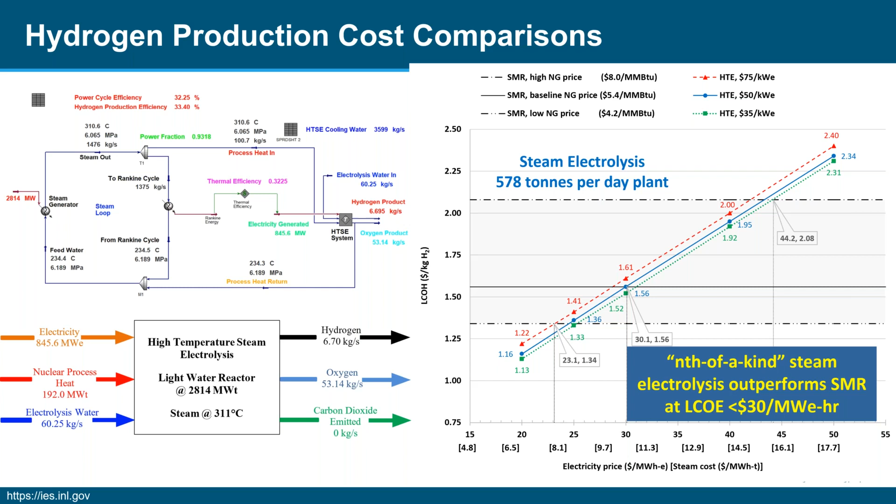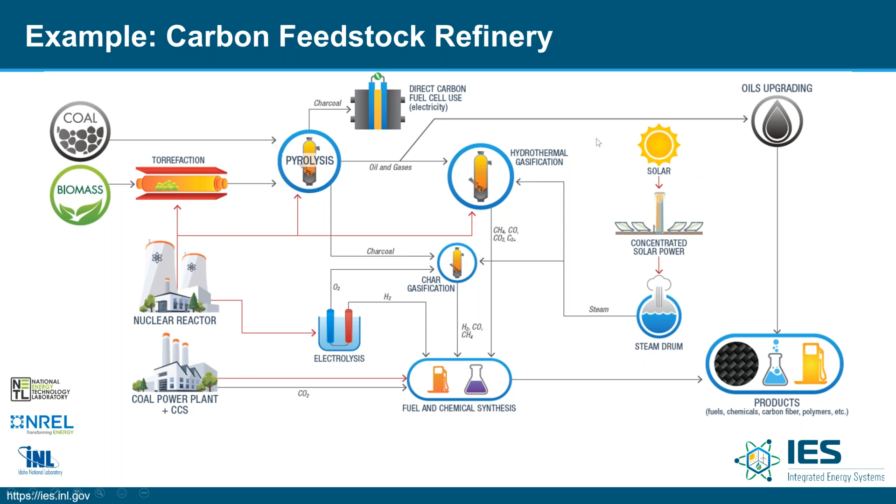We're not just looking at hydrogen, we're also looking at other applications where we can utilize carbon feedstocks. For example, rather than burning our carbon-based resources to produce electricity or heat to drive industrial processes, we're looking at those resources, such as coal and biomass, as feedstock to achieve these end products on the right, such as fuels, chemicals, carbon fibers, and polymers, using energy derived from non-emitting sources such as nuclear facilities and fossil facilities with carbon capture and sequestration, as well as renewables that can provide energy to drive these processes.

So when we look at different markets for nuclear energy, we have to understand what the cost of producing steam is and how that impacts the cost of the end product. These are some of the initial analyses we can conduct to understand whether or not nuclear generated steam is an option to support these industries.

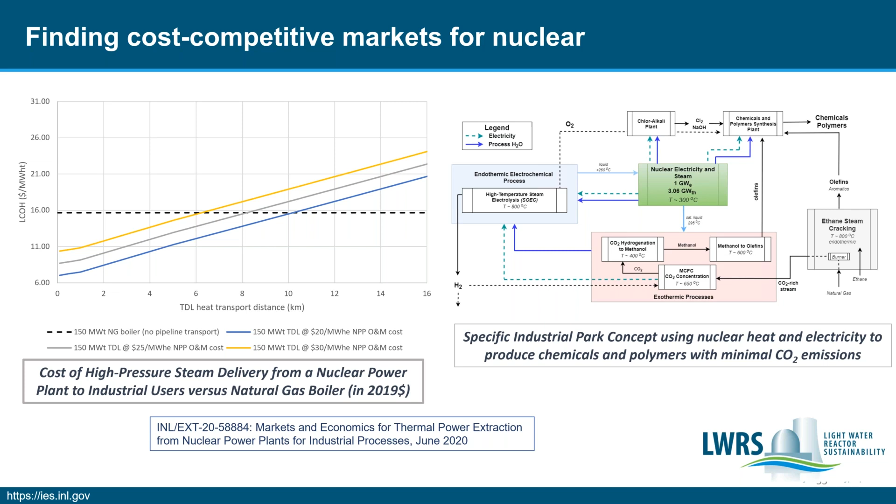We're also looking at experimental demonstrations. Before we move to these nuclear implementations, we are developing a non-nuclear electrically heated laboratory that allows us to understand the various interconnections and control approaches in these integrated systems.

We take advantage of a number of facilities within our laboratory, including a microgrid representation on the left. We have a human system simulation laboratory that represents a control room, what this would look like in an actual nuclear plant, so we can understand how these systems would be operated when we're now having multiple product streams that need to be understood and managed.

We have a coupled industrial process. This is an installed hydrogen production facility, a high temperature electrolysis system. We are currently installing these components at the bottom, our thermal energy distribution system, as well as a microreactor emulator here at the bottom, the magnet facility.

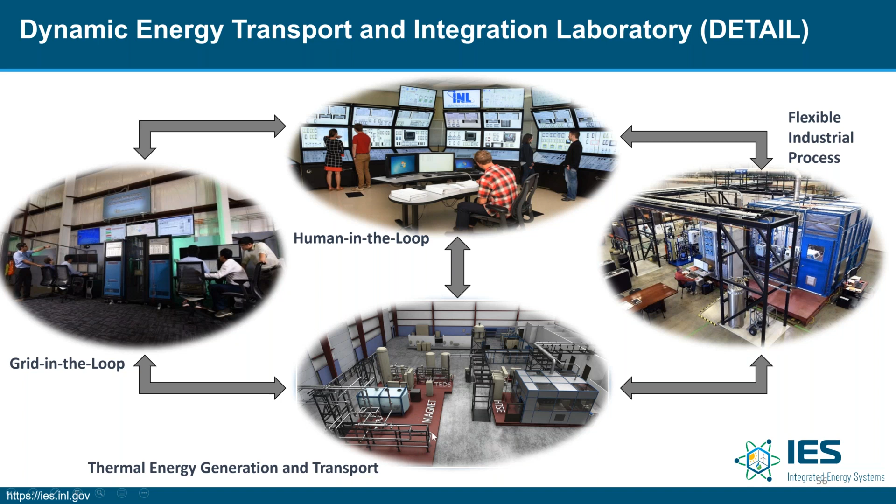What this will allow us to do is understand how we can make all of these interconnections between a reactor facility, an intermediate loop to move that energy to a variety of users, as well as energy storage, controlling that system such that we can support electrical energy users via the grid or electric vehicles or electric batteries, and bringing in our renewable resources.

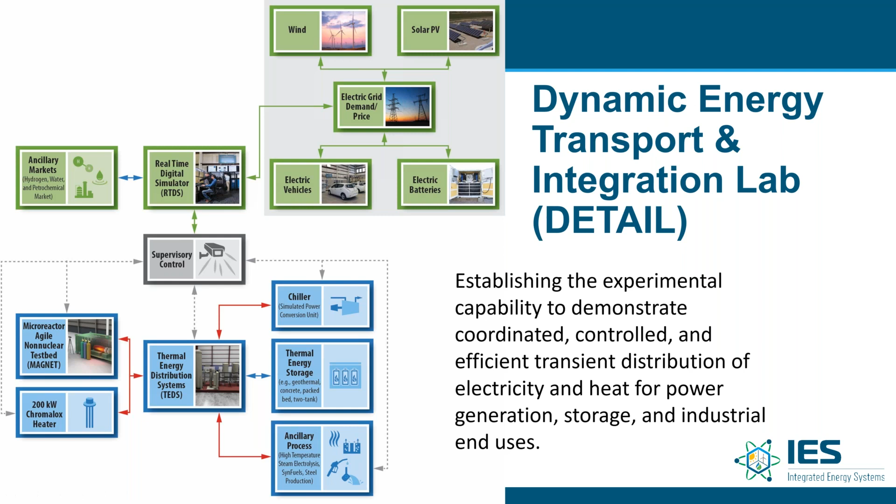We represent the power systems in the grid using digital real-time simulators within this laboratory as well, so that we have this overall experimental capability to understand the interaction and interplay of these different components, these different assets.

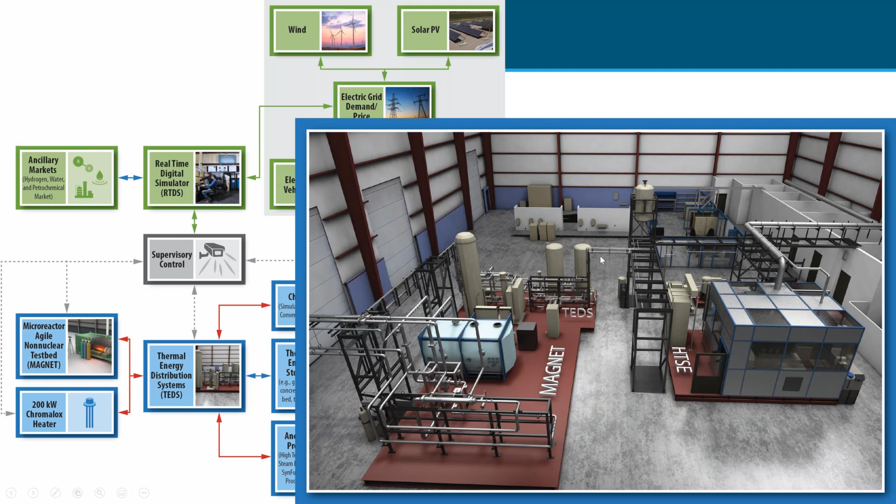This facility is currently being built. The high temperature electrolysis system is installed and operating, and these components on the left of the rendered image are nearly complete and will be operating in December.

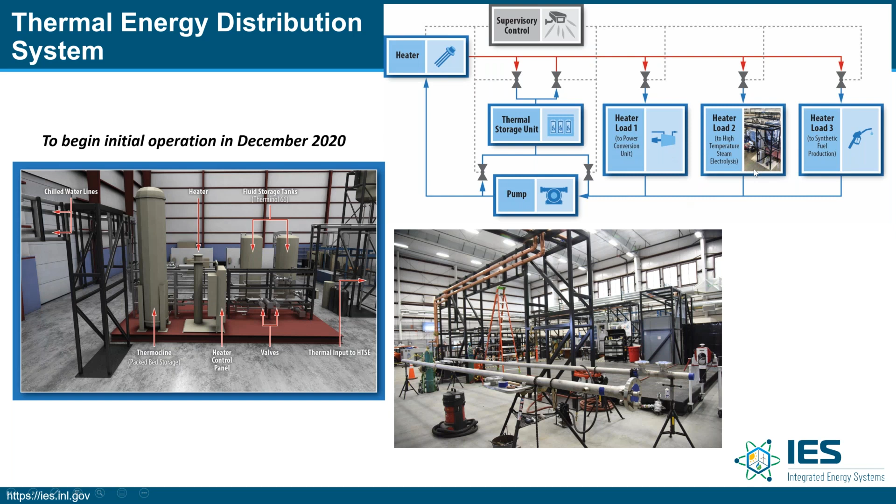Looking a little more deeply at the thermal energy distribution system, this includes a thermocline to represent thermal energy storage. We include a controllable heater element to represent dynamic thermal energy input from a reactor, and this will be coupled to that microreactor emulator as well, and will allow connection to multiple loads, including a power conversion unit that will be installed later, as well as high temperature electrolysis and other loads.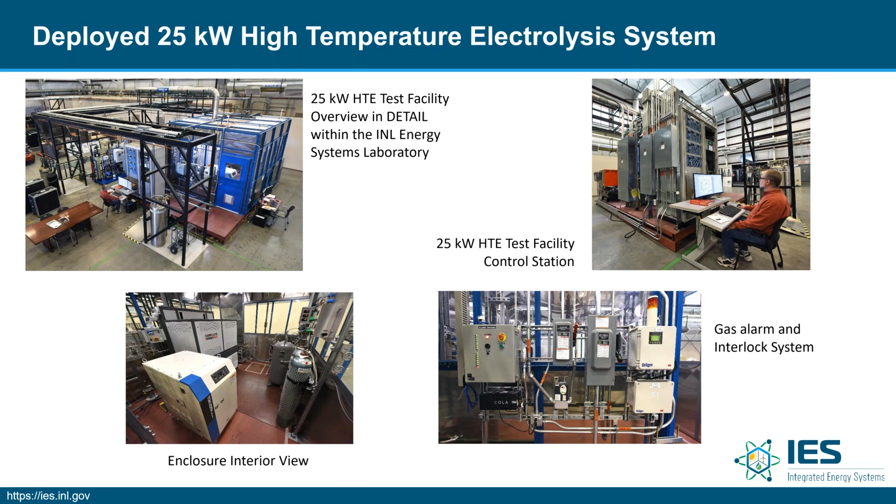As I mentioned, our high temperature electrolysis system is already operating. This is a 25 kilowatt electric facility, and we are going to be installing a much larger facility this next year that can go up to 250 kilowatts for the hydrogen production.

We used our analysis tools to understand how we might produce and the potential economic performance of producing hydrogen at existing fleet plants. These projects were done in collaboration with industry partners at Exelon, as well as Energy Harbor, that also includes partners at Xcel and APS in the US.

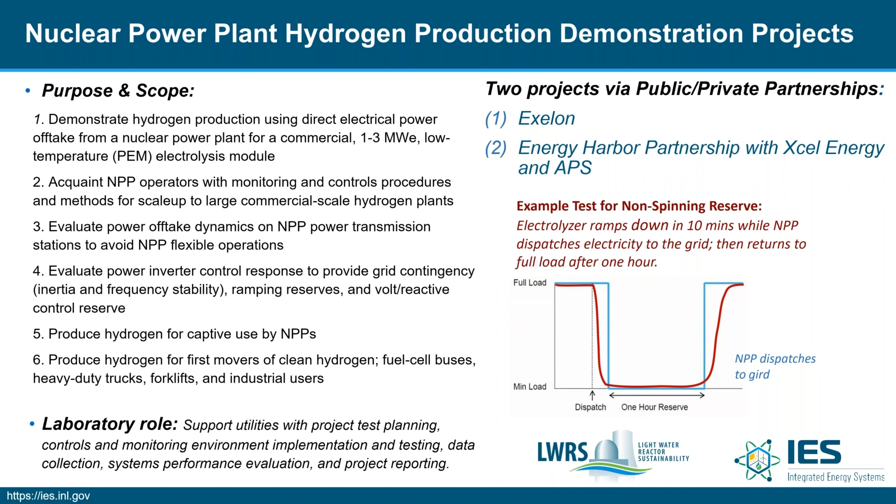We are working toward demonstration of these concepts. At Exelon, they will be demonstrating on-site production of hydrogen at one of their plants in the US Midwest. That hydrogen will be used to meet on-site demands, but it will also be used to meet demands of the regional hydrogen markets, for transportation and other nearby users.

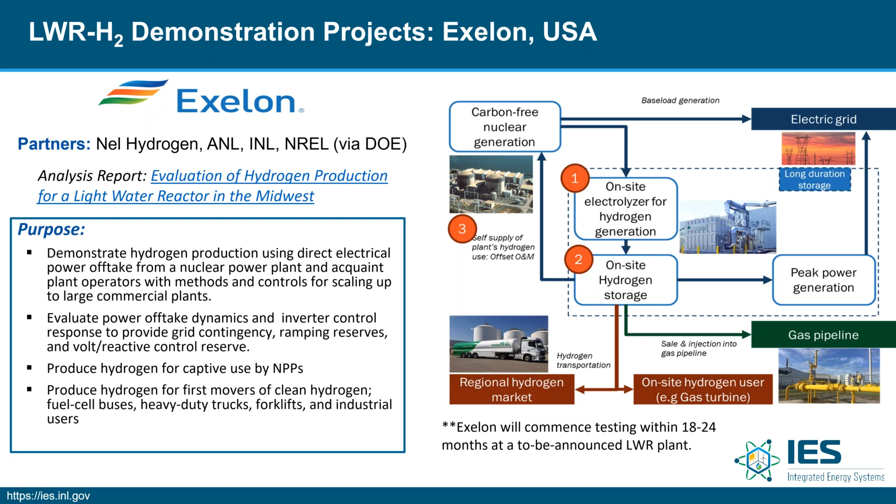They are working through the detailed engineering designs now, and they expect to commence testing in about a year and a half. They will be announcing the plant that this will be implemented at very soon.

If we look at the Energy Harbor project, this is using a slightly different approach for the integration of the hydrogen production facility and using a different vendor for those hydrogen production components, operating within a different market. So we can look at very similar projects with very different variables to understand the different performance.

This project is among a consortium of utilities, as I mentioned, and will be implemented at the Davis-Besse plant. The work that we do in these current fleet plants will allow us to establish a foundation that will help us understand how we might move forward in designing a greenfield facility, specially designed to utilize these nuclear technologies, advanced reactors, for example, to produce alternative products.

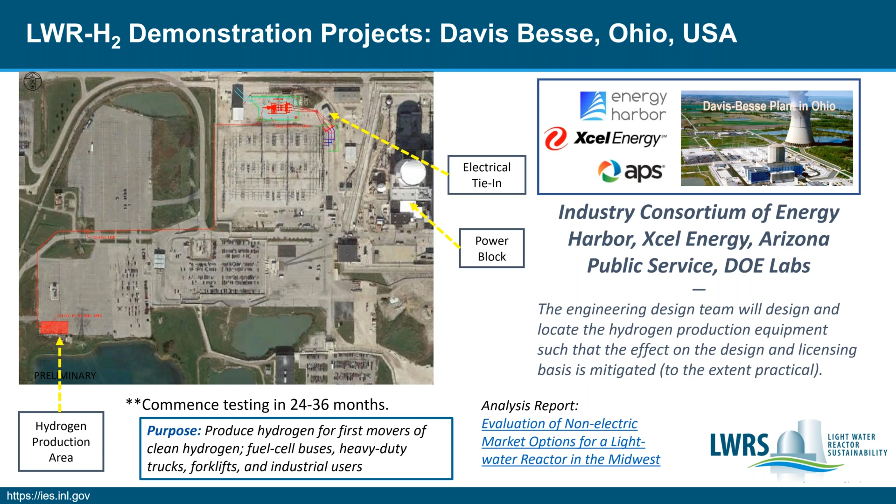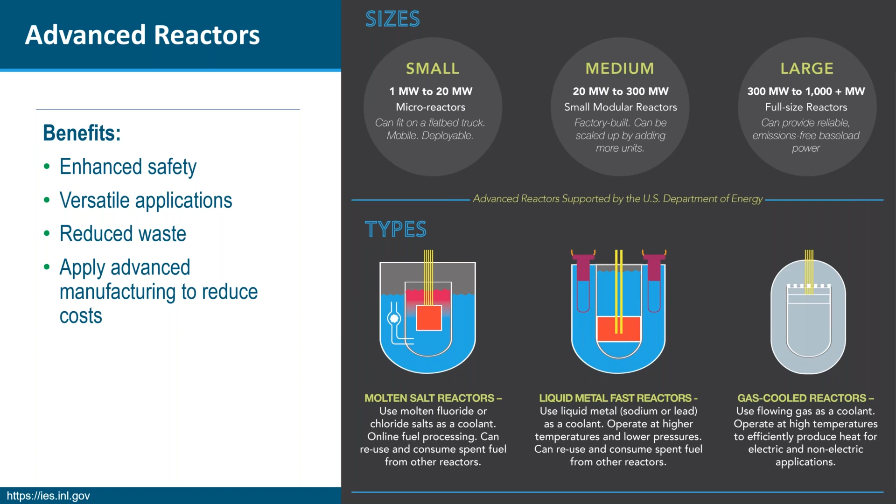So you all are from the advanced reactor community. You know the variety of options that advanced reactors bring to us, ranging from molten salt reactors to liquid metal fast reactors and gas-cooled reactors operating at higher temperatures and with enhanced safety.

What this means when it comes to production of alternative products is higher efficiency. The top line in this plot represents what we'll be doing at these current fleet plants, implementing PEM electrolysis, low temperature electrolysis, to produce hydrogen with an overall efficiency of about 22%. When we introduce high temperature electrolysis using heat augmentation techniques with those light water reactors, we can bump that efficiency up to about 35%.

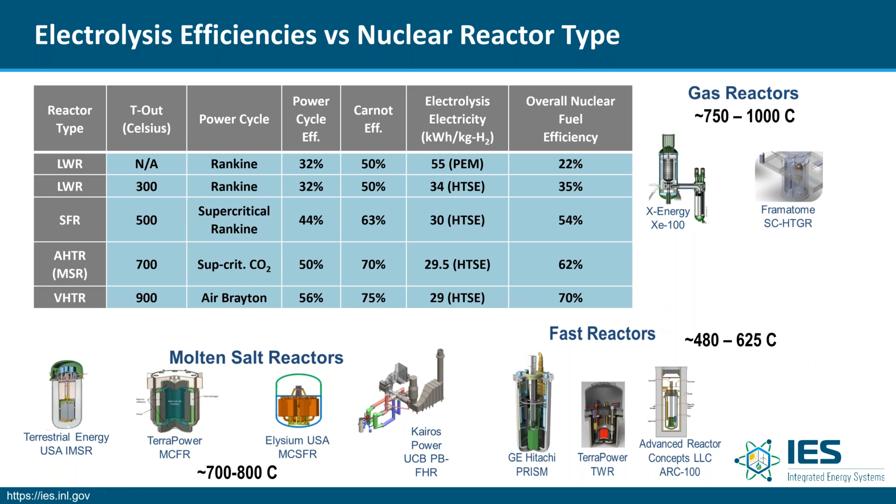When we begin to move to these higher temperature reactors, that's the real win. Now we begin to get to these very high efficiencies in how we produce those end products. So there's great potential for these higher temperature reactors in achieving alternative product production.

Now we are working with a number of different programs to help move toward these advanced reactor applications. Many of you are probably aware of these programs, but briefly, the Gateway for Accelerated Innovation in Nuclear, or GAIN, was established about 5 years ago to provide an access point to laboratory facilities and expertise from the community into the laboratories. GAIN is working with NRIC, the newly established National Reactor Innovation Center, which will provide the capability to build and demonstrate reactor concepts working with the laboratories.

So we're moving in a direction where we have a lot of capability to demonstrate these advanced reactors. And by 2025, NRIC is charged with developing at least 2 different advanced reactors to move these technologies further toward commercialization on a very rapid time scale. And I'm excited to say that integrated energy systems are a key part of these test facilities and the plan for demonstration of these advanced reactors. So we expect awards to be coming out very soon and to understand what reactors will be demonstrated.